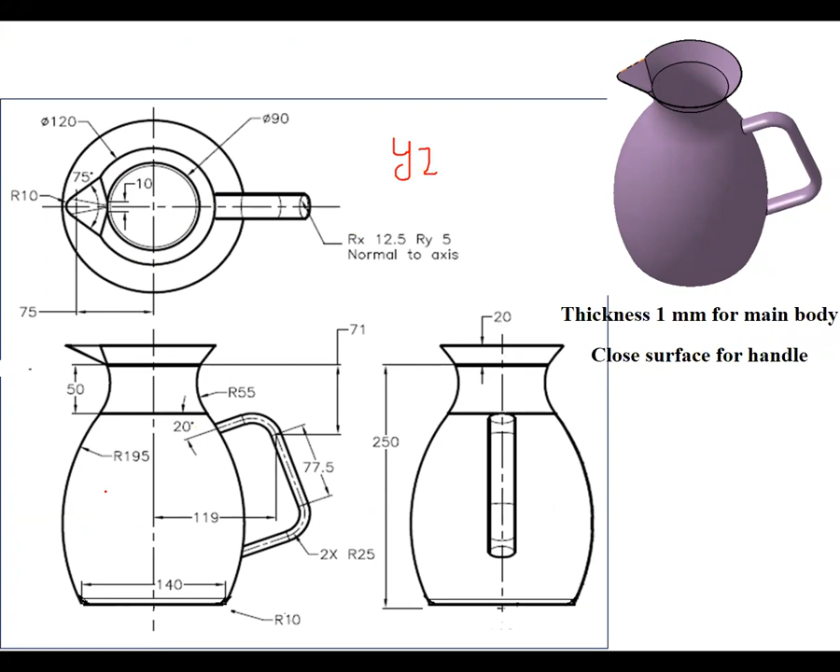Anyway, I will start from the beginning, because many students could not do it last week. So we select the YZ plane, from the front view, so this one is the front view. We select the YZ plane and make this sketch first, up to here, and we can use arcs.

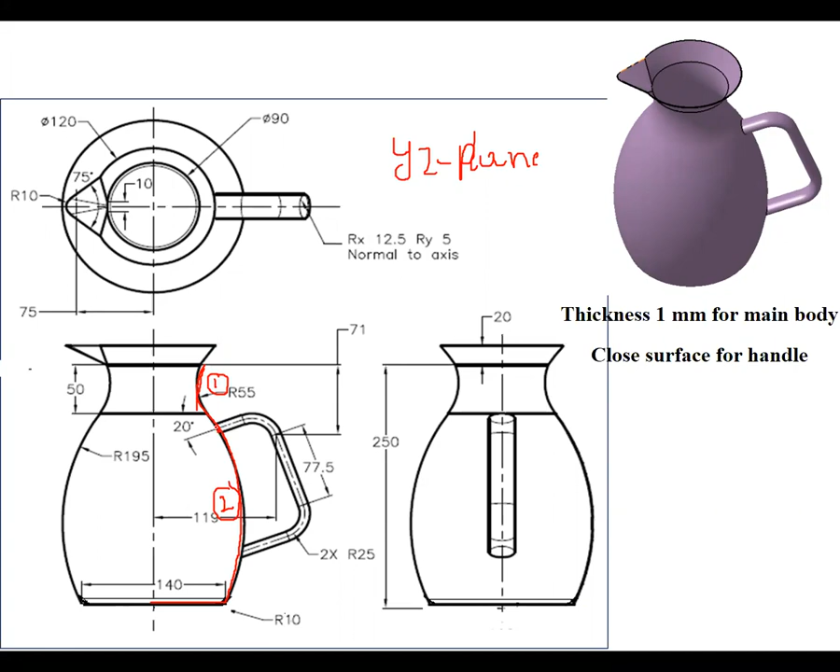So this is one arc and this one is the second arc, and both are meeting at this point, and you have to use the tangent constraint because we have to have a smooth curve between these two arcs. And we can join this arc to the vertical axis with a line. That is the revolve surface. We have to revolve this sketch around this axis, and then we get the bottom surface.

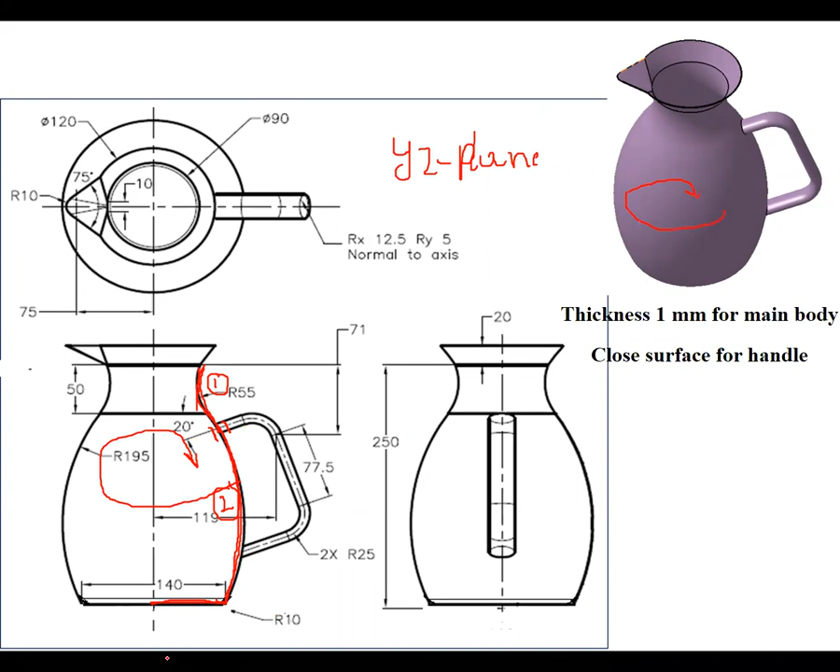So let's get started with CATIA. I close this one and start Shape, Generative Shape Design, and give the name of the part, any name of your choice. I gave jug, and here I choose the YZ plane because I am drawing the front view sketch. So select the YZ plane.

So make the sketch. First we have to choose the center point arc tool, and the arc center point is somewhere else, I don't know. If this is the horizontal axis and this one is the vertical axis, you can see in CATIA H and V. H means horizontal axis and V vertical axis.

So we can start the arc from the horizontal axis and end anywhere, because I don't know the ending point. And 55 radius arc. I choose center point arc. Where is the center point arc? Below the circle, you can see. In V6 also you can see the center point arc below the circle, the last option.

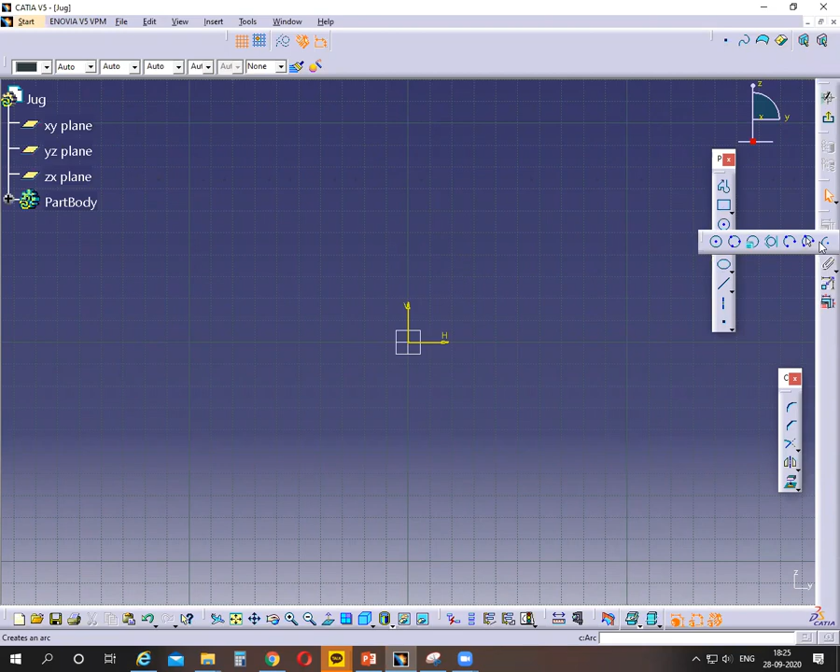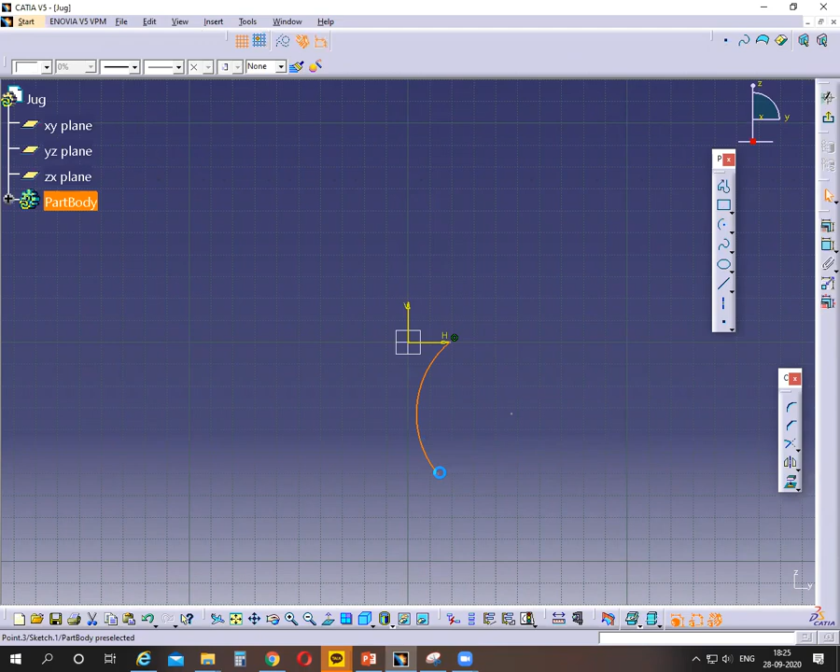So I can start from anywhere, because I don't know the center location. That is the center point of the arc, and the starting point is touching the horizontal axis, and the ending point also I don't know, so we can end anywhere, maybe here or here. The radius of the arc is given as 55 millimeter.

And from here to here, this one is given as the length. The length is 90, right? The diameter of this big circle is 90, so the radius is 45, from here to here. From the horizontal axis to this point is 50, and from the vertical axis to the starting point is 45 because the diameter is 90.

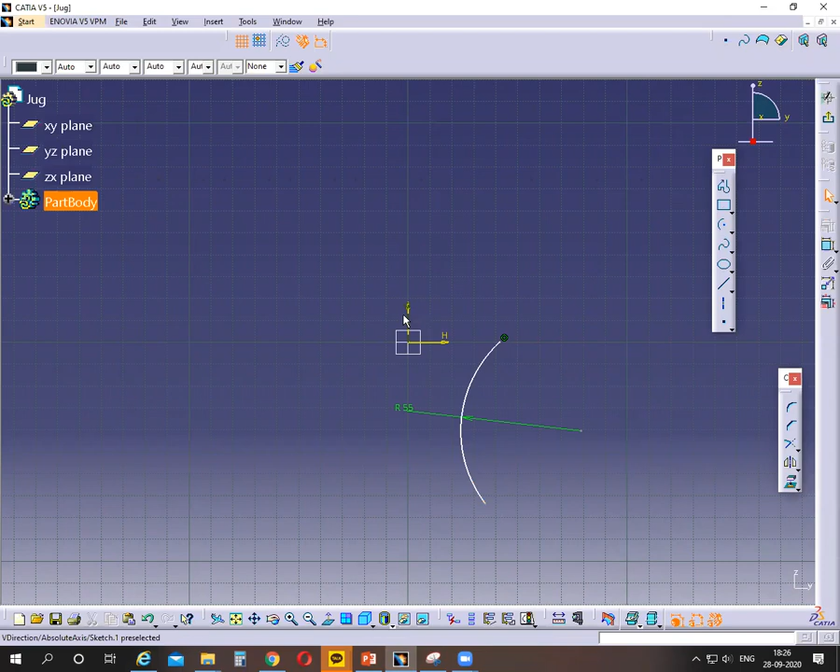So select the vertical axis and that point. The radius is 45, meaning this length. And from here to the horizontal axis is 55. So all dimensions of that arc are given. It is still in white color because we have to connect this arc with another arc, so there is no complete constraint.

Next I have to make another arc. The center point maybe somewhere else, maybe here, and the starting point is the ending point of the first arc, and the ending point I don't know, you can end anywhere. So what is the radius? The radius of the arc is R195.

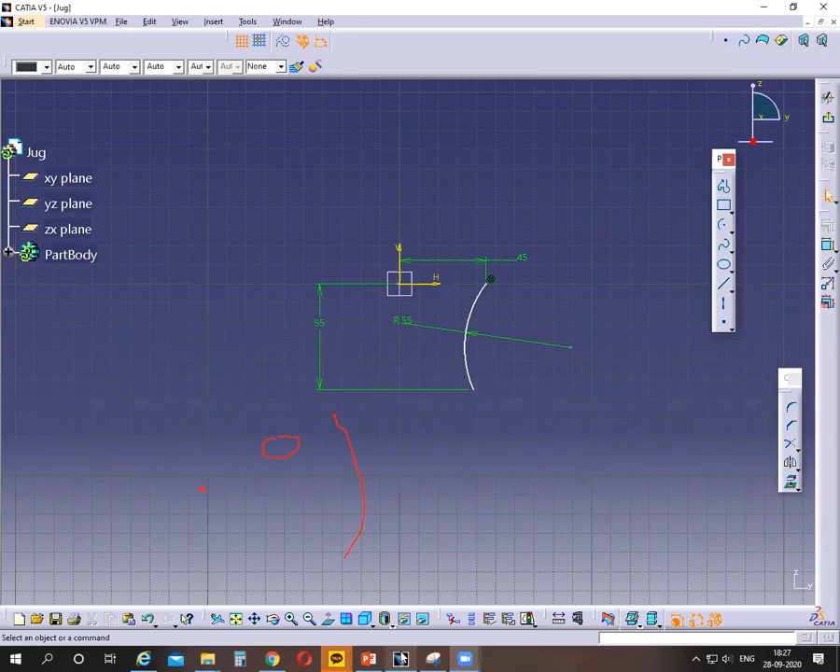So, okay, you can start from anywhere here. So touching the first arc. Okay, starting point of the second arc is ending point of the first arc, and so we can end anywhere because I don't know the ending point.

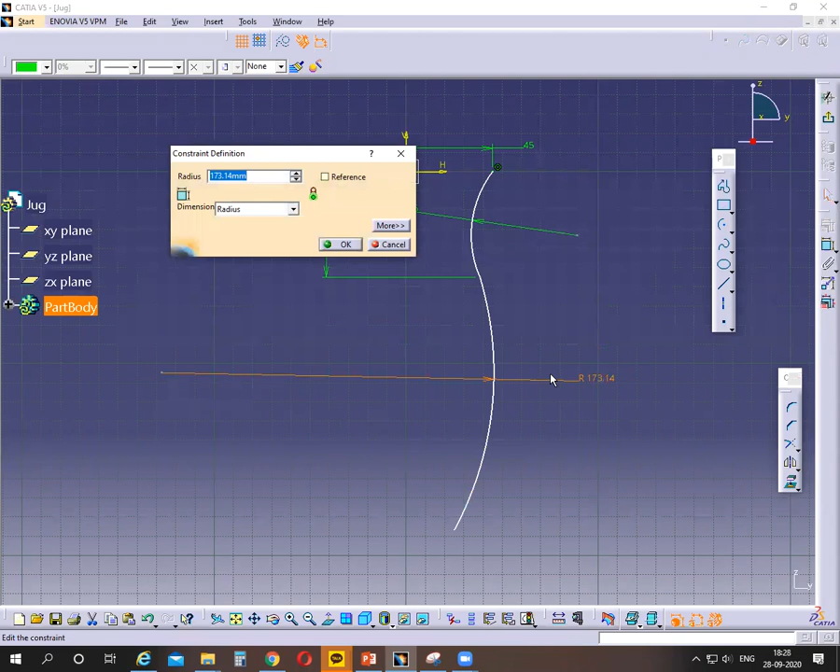So, and radius of this arc is 195, and also join this arc with the line. Okay, so join the arc with the vertical axis using a line. Okay, touching the vertical axis.

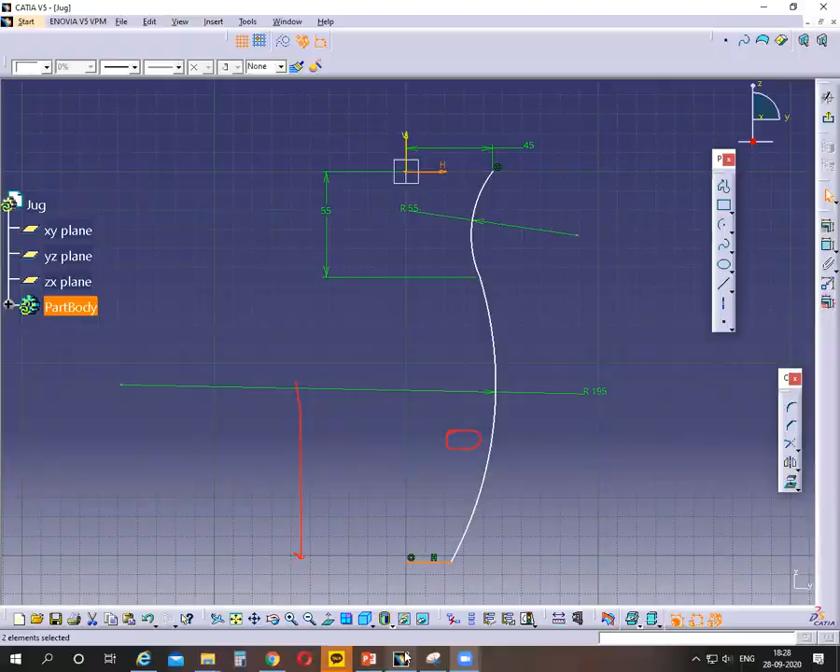So now total height of this one and this one is given from here to here. Okay, so from here to here total height is given in the side view, 250 millimeter. Okay, so from the horizontal axis to this line 250 millimeter. Okay, and it is moving a little bit, so you can move that one.

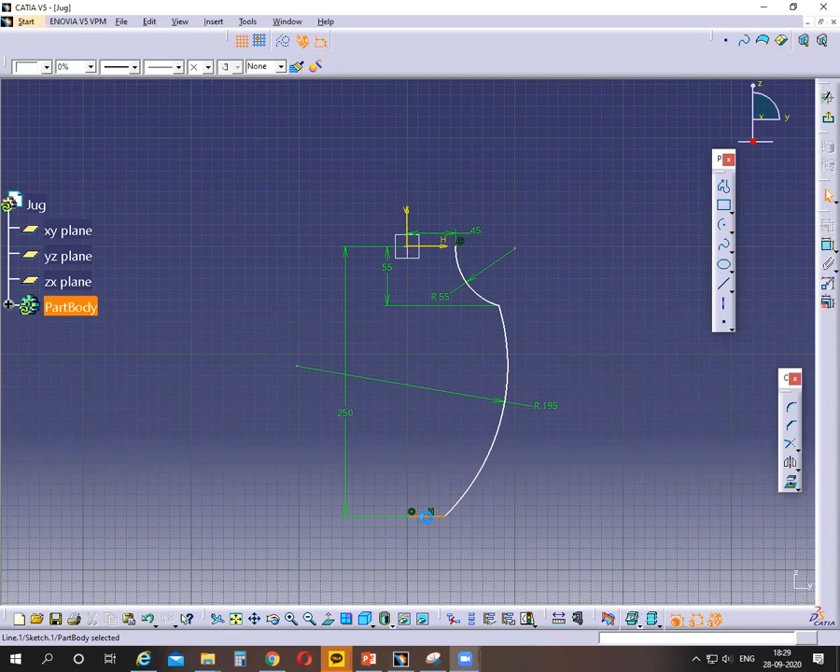And what is the length of this line? So total length is 140. Okay, 140. So half of that one, right? 70. So length of that line is 70. So you can give 70 directly, or you can choose 140 over 2. Okay, so 70.

And so there is a smooth curve between these two arcs. So we need to give tangent constraint. How to give tangent constraint? Select this arc and select this arc. Both the arcs select together using control key. Use control key to select as many as you want. So hold the control key and select this arc and select this arc.

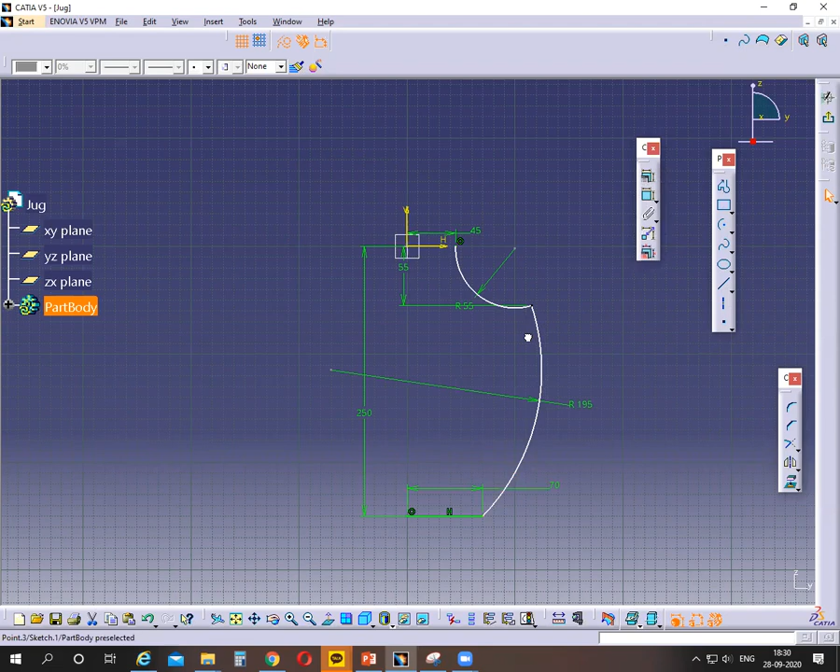And here you can see the constraint defined in dialog box. So in V5, below the constraint toolbar you can see this one, constraint defined in dialog box, and tangency constraint. So both are tangent to each other, so tangency constraint. Okay, so the sketch for the revolve is completed.

So just make this arc starting from the H axis and ending somewhere else, and another arc starting from this point and ending somewhere else, and join this arc ending point with the vertical axis using a line and give the dimensions. So from here to here 250, select this one and this point 55, the radius of this arc is 195, the radius of this arc is 55, and from here to this point 45.

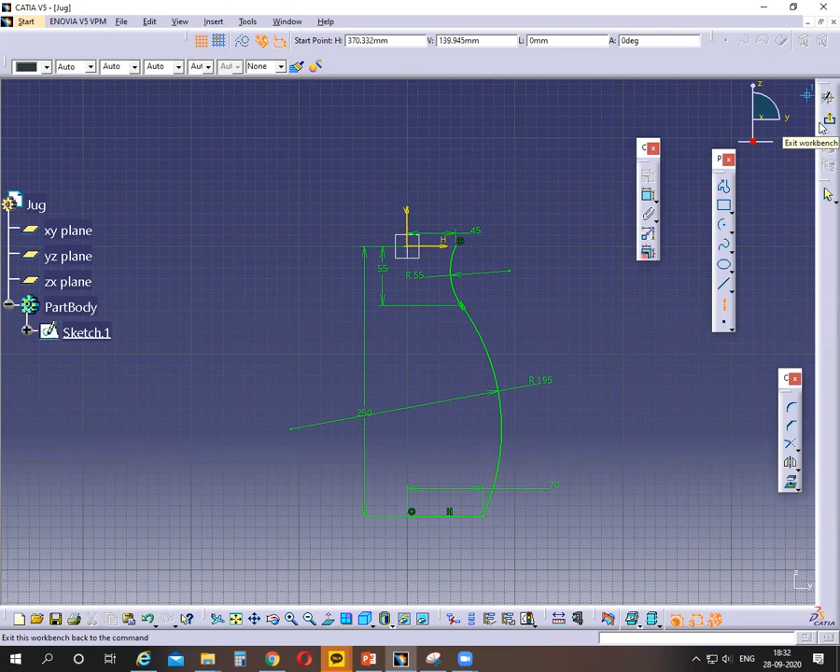After finishing this sketch, you can use a revolve surface. In revolve, you can draw a center line along the vertical axis, then you don't need to select the revolution axis, because the center line is the default revolution axis. If you don't draw the center line, then you have to select the vertical axis as the revolution axis.

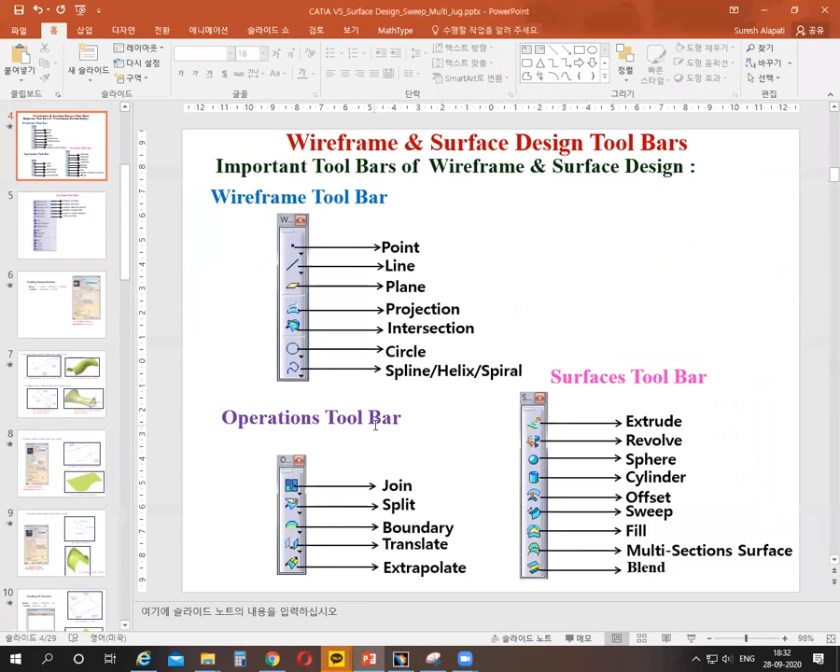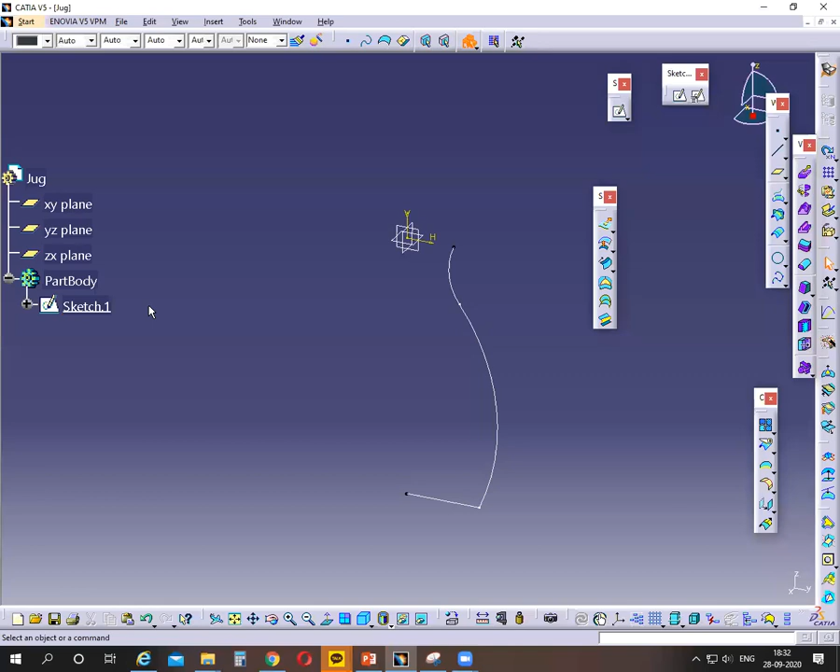So where is the revolve? Below extrude you can see this one, revolve, in V5. So revolve, select this one. I already selected. Some students may not have selected. Orange color means selected in V5, and in 3D Experience sky blue color means selected.

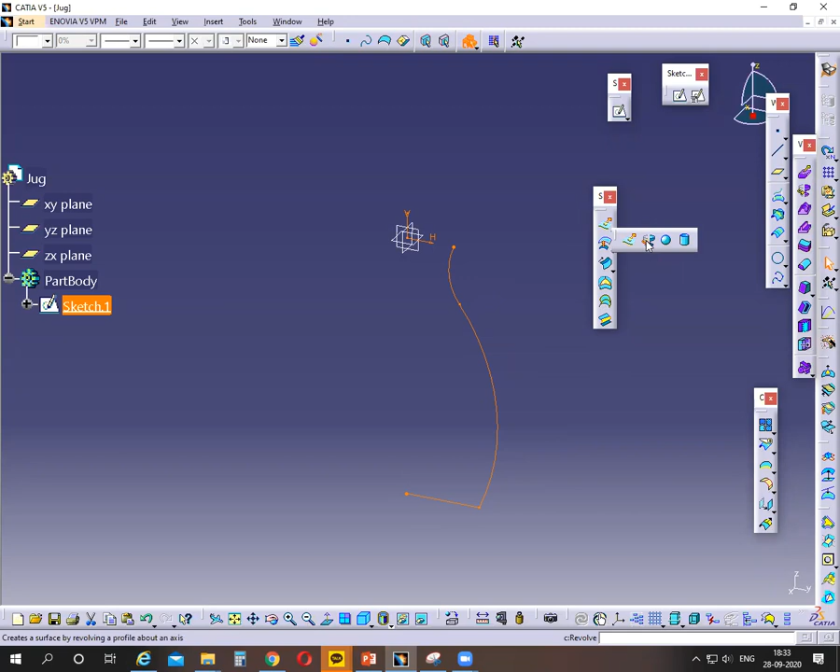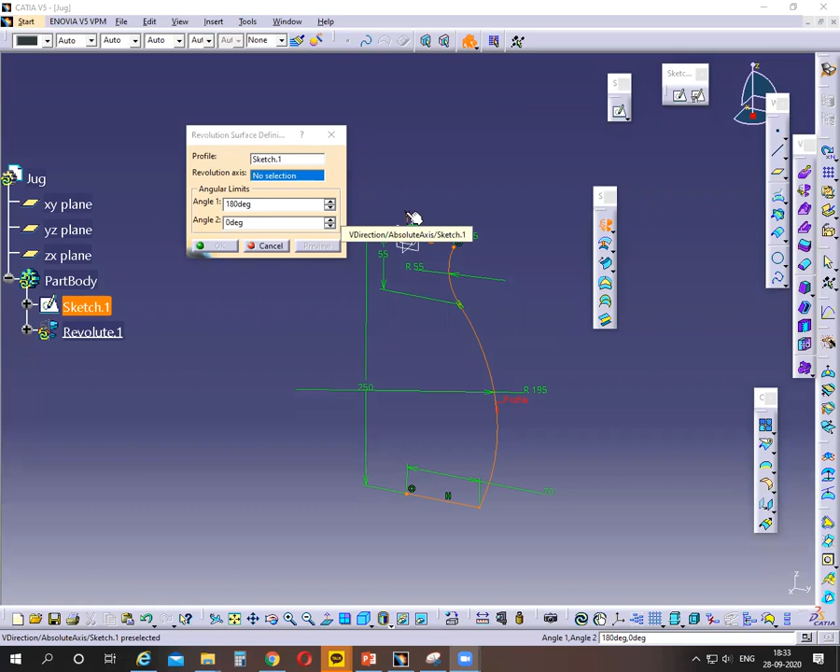So revolve. Sketch 1 got selected already because I already selected. If there is no selection, click on this curve. And revolution axis, no selection, right? So what is the revolution axis? This one, the vertical axis. And the revolution angle is a complete revolution, 360 degrees. So that is the end of the revolution.